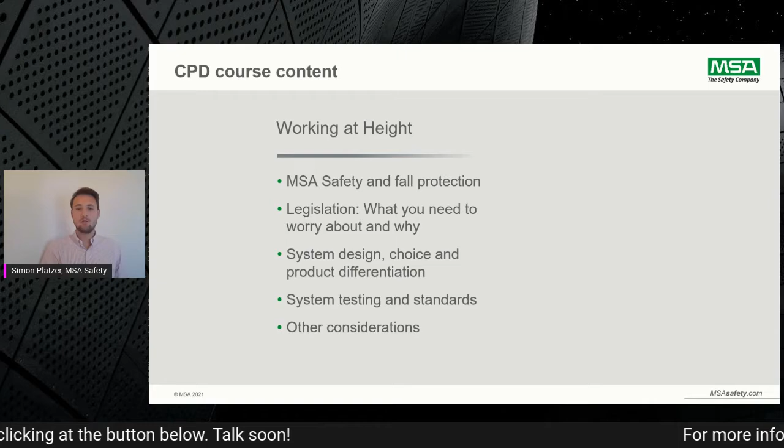The purpose of this section is to establish MSA's credentials in running the CPD and get the delegates familiar with both the MSA and Latchways brand offer so that they feel confident they are hearing the message from the right people.

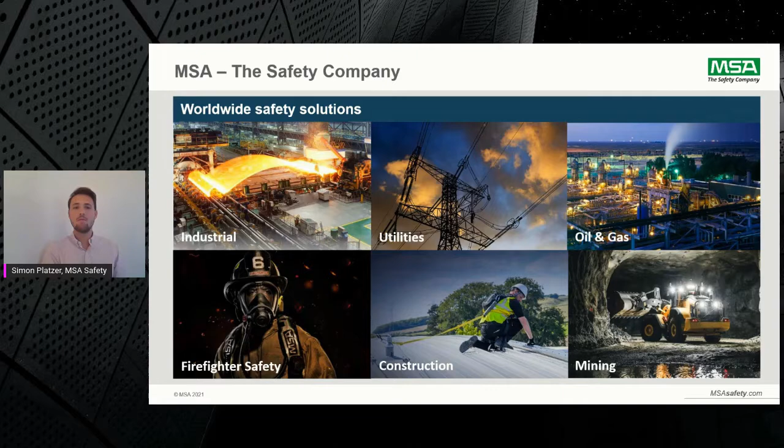With our global credentials, MSA is a global leader in the development, manufacture, and supply of safety products that protect people and facility infrastructures with over 100 years proven heritage. Our global headquarters is based in Cranberry Township, near Pittsburgh in the US, with annual sales of approximately $1.2 billion and manufacturing operations in the United States, Europe, Asia, and Latin America, backed by R&D facilities in 3 continents. Our comprehensive line of products is used by workers around the world in a broad range of industries, including fire service, oil and gas, petrochemical industry, construction, mining, and utilities.

We are specialists in fall protection. MSA acquired the Latchways brand in 2015 and established its Fall Protection Center of Excellence in the UK. The Latchways brand has always been a recognized leader in fall protection, and the origins of the product range go back to 1974, when the Latchways founder, Commander Tupper, developed the Transfastener, a product that allowed yacht crew to walk around the boat whilst permanently attached to a fixed cable. The system was quickly adopted for use in the industrial sector as a complete hands-free fall protection solution. It was designed to work on buildings, inclines, vertically, around bends and corners.

Nowadays, we still use the MSA Fall Protection Center of Excellence in the UK for our testing, for R&D actions, but also as a production plant. Last year, we made around 1,600 tests of our existing product range, but also of enhancements or new developments, to make sure that the products which are installed out in the field are perfectly tested and fit for purpose.

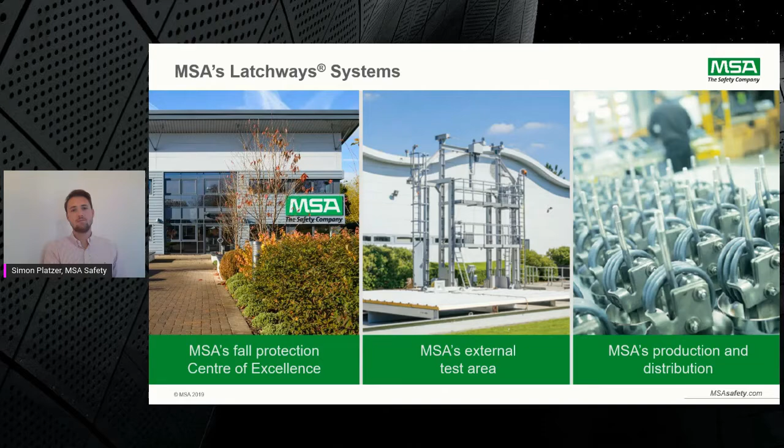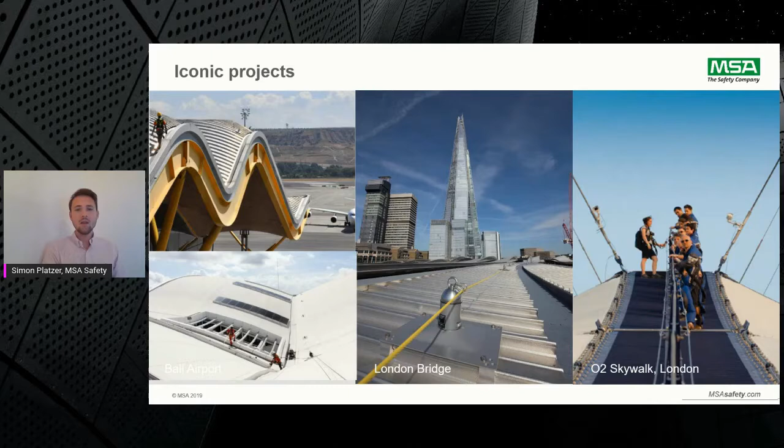In 2001, the Latchways Constant Force Post was launched, revolutionizing the installation of roof-mounted systems. The unique constant force technology was also incorporated into horizontal, vertical, inclined, and overhead cable lifelines. This is still virtually the only roof anchor system that supports the warranty across multiple leading roofing manufacturers. We'll see later why this is a very important fact.

Hence why we and Latchways Fall Protection Solutions are specified and installed all across the world. As you can see, with references going from Europe, from the O2 Skywalk or the London Bridge, which is well known, over to the Pentagon and NASA workshop in the US, but also on the Bali Airport, the new Doha International Airport, or Bangalore. There are references all around the globe where people trust the solutions of MSA Safety.

The purpose of this section is to explain legislative considerations for specifiers' responsibilities and what liabilities they may have if different products are used for a specification that haven't been tested to the same standard.

Legislation is there to save life. The importance of working at height legislation cannot be underestimated, with falls from height still being one of the largest causes of workplace deaths and life-limiting injuries. You are playing a vital role in helping eliminate that through better design safety measures and implementing to specification, both on new projects and retrofits.

As professionals, you must understand the workplace health and safety regulations as they relate to work at height. It is important that as designers, you ensure that you take up your responsibilities during the project design stage and facilitate continued safe access on buildings throughout their lifetimes. This also includes providing method statements detailing how the provision of safe access can be achieved.

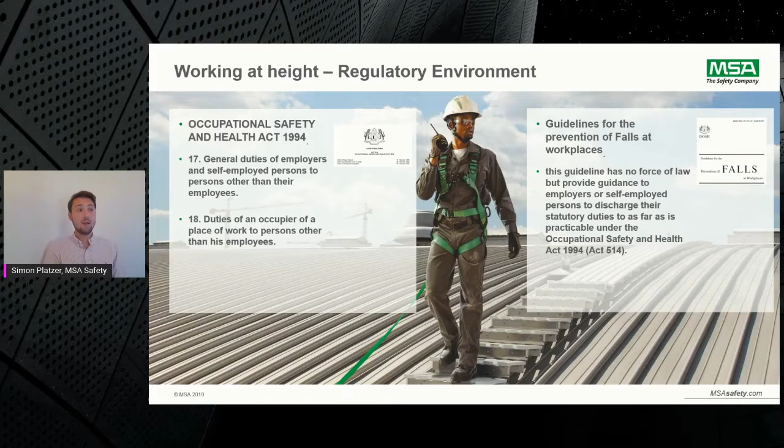On the screen, you can see the Occupational Safety and Health Act from 1994. We will now look into Task 17 and Task 18, which are general duties of employers and self-employed persons to protect persons other than their employees, and the duties of an occupier of a place of work to persons other than his employees.

Let's look into Part 4, General Duties of Employers and Self-Employed Persons, of the Occupational Safety and Health Act 1994.

Clause 17 clearly says it shall be the duty of every employer and every self-employed person to conduct his undertaking in such a manner as to ensure, so far as is practicable, that he and other persons not being employees who may be affected thereby are not exposed to risks to their safety or health.

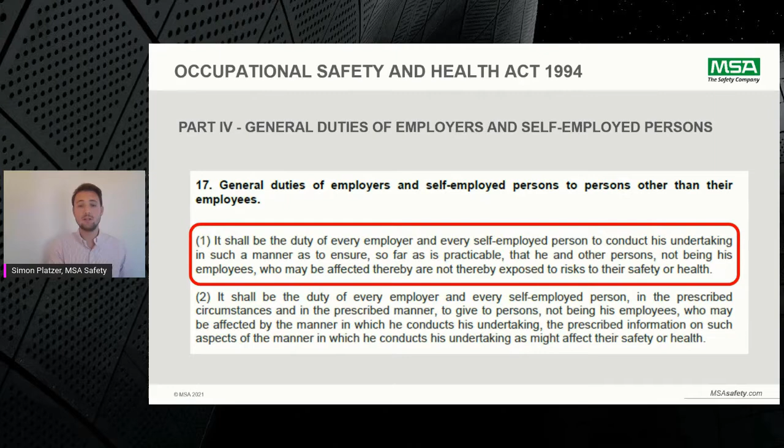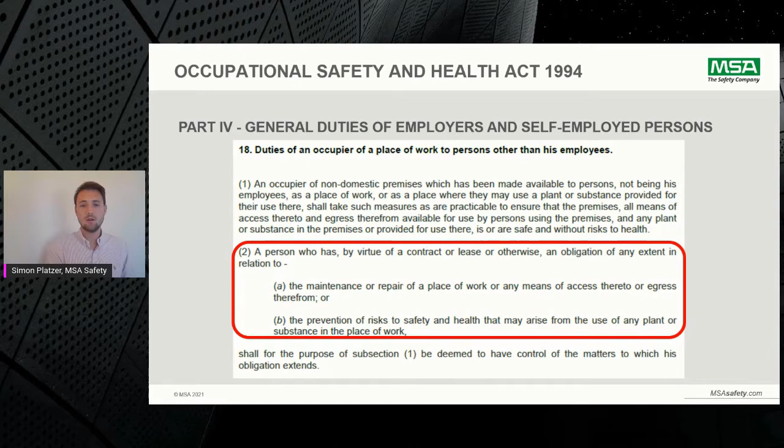Additionally, we'll look into Part 4, Clause 18, which says a person who has, by virtue of a contract or lease or otherwise, an obligation of any extent in relation to the maintenance or repair of a place of work or any means of access or egress, must address the prevention of risks to safety and health that may arise from the use of any plant or substance in the place of work.

So the key points for working at height are: you must document in the health and safety plan your fall protection strategy for managing all hazards and risks throughout the design phase through the occupation of the building, and then supporting any ongoing work such as building maintenance and cleaning.

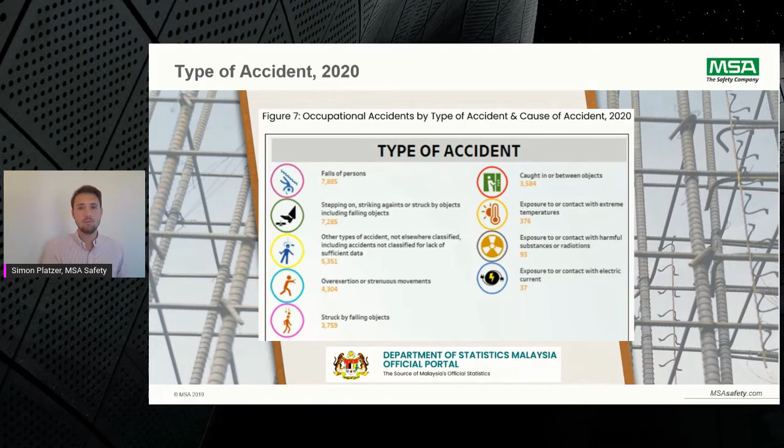Clarity on who is responsible for life is very important. The principal designer is responsible, and if there are multiple contractors, one principal designer and one principal contractor must be nominated.

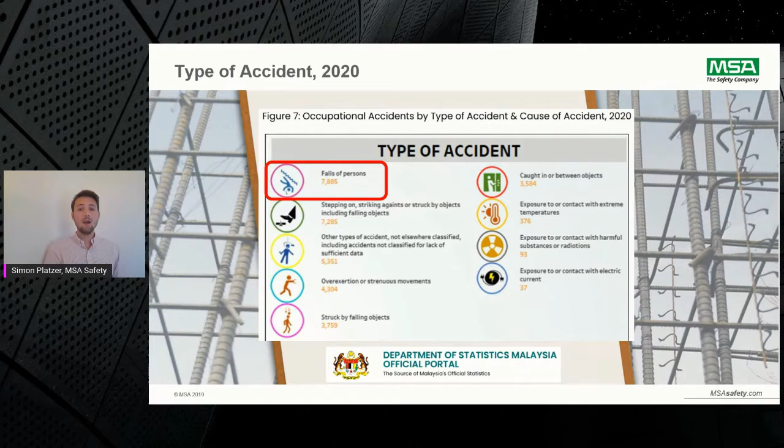Based on the Department of Statistics of Malaysia's official portal and reports of 2020, falls of persons are still the main cause of accidents, with 7,885 falls happening in 2020. So whilst we can see people wearing hard hats, safety boots, and many other PPE measures all over the place, falls of persons are still an underestimated risk, yet remain the largest cause of accidents in 2020.

So there are some CDM considerations for fall protection which principal designers must consider to be confident. Roof types affect the design and fixing method—take secret fix roofs, standing seam roofs, and warm flat roofs, for example. The anchor will perform differently on different materials when forces are exerted.

Check that the system you use has been tested in the way you need, meaning representative testing on the roof structure itself. Many contractors substitute like for like, but neglect the suitability for use on a specific roofing system. This is one of the main reasons it is important that a manufacturer tests on every roof type their system will be fitted to.

If the equipment you have specified is changed without your knowledge, you could be held legally liable in the unfortunate event of an accident. Energy absorption technology means that in the event of a fall, systems deploy in a controlled manner to absorb the force generated.

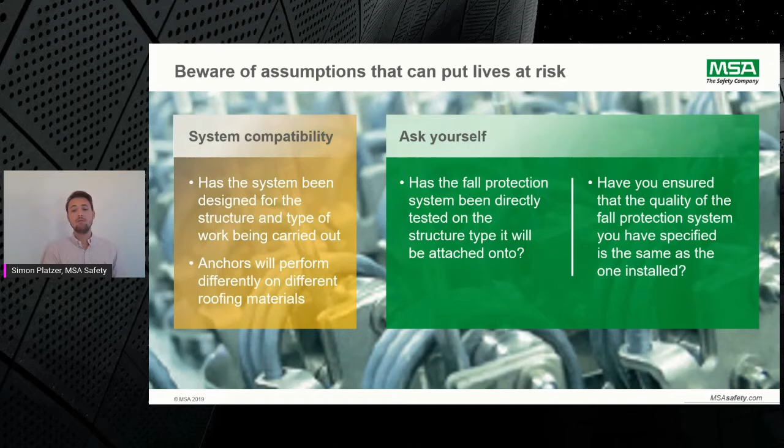In doing so, it ensures that the load exerted on the point of attachment will not exceed 10 kilonewtons, allowing the post to be fixed to a relatively delicate structure without the additional requirement to attach to structural steel or purlins. This ensures the roof or structure remains intact and workers are kept safe, even in the event of a fall.

Let's go to the next section of today's session. This purpose is to explain legislative considerations for specifiers and what liabilities you might have.

The hierarchy of fall protection helps structure your planning from the outset. So the hierarchy is: wherever possible, firstly eliminate the risk; next, where you cannot eliminate, guard the hazard; and finally, protect the worker.

The fall protection solution specified should be based upon the area requiring access, the frequency of access required, the number of people needing access to the area, and the level of training these people have gone through or will undertake. For instance, we can choose both collective and personal fall measures to prevent a fall, and similarly implement personal safety measures that can reduce the consequence of a fall.

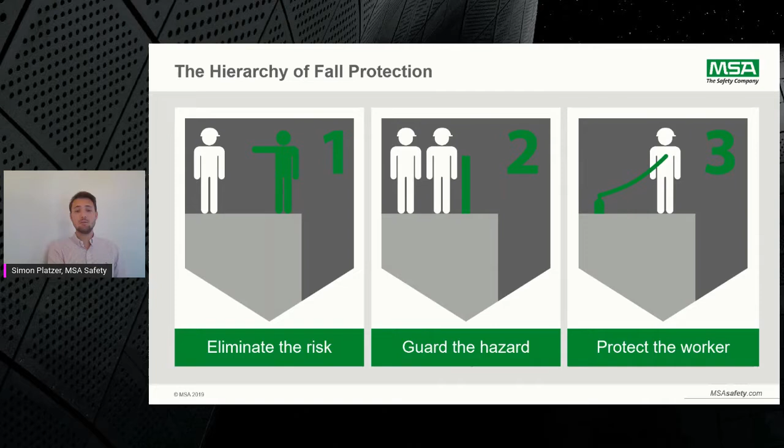Again, we are looking into the hierarchy of falls or risks. First of all, we want to eliminate or substitute the risk as much as we can. If we can work from ground level or substitute the maintenance process completely, then we should be doing so.

If that's not possible, we should be looking into passive fall protection, so we want to guard the hazard by isolating or separating the hazard from the workspace.

If that's also not an option on your project, then let's go into the personal fall protection hierarchy, which means first of all we should always try to make sure a fall restraint system is applicable on site. That secures the workers using a short lanyard, short enough to protect the worker from falling off the edge.

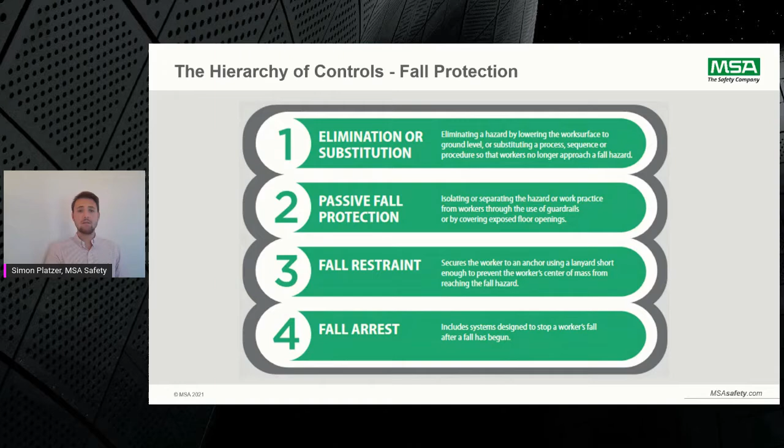Due to certain challenges on projects, we might have to go to the last phase, which is a fall arrest system. In that case, we will have to make sure we have a suitable system and a suitable product selected, but also incorporate the right rescue procedures.

Let's look at system choices.

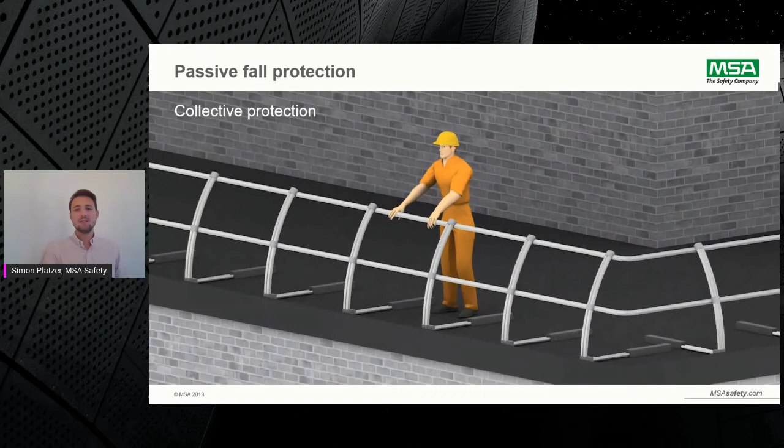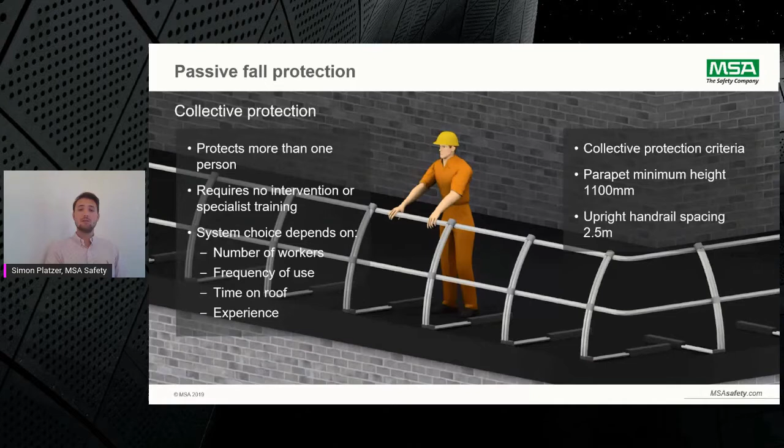Collective protection is any system that allows numerous untrained users to access an area whilst being protected from fall hazards, without the need for personal protective equipment such as harnesses, retractables, or lanyards. Once properly installed or erected, collective protection does not require any action by workers or specialist training to keep them safe. There are detailed criteria to consider, such as the parapet minimum height, the upright handrail spacing, the roof area where it's installed, and the standards it has to comply to.

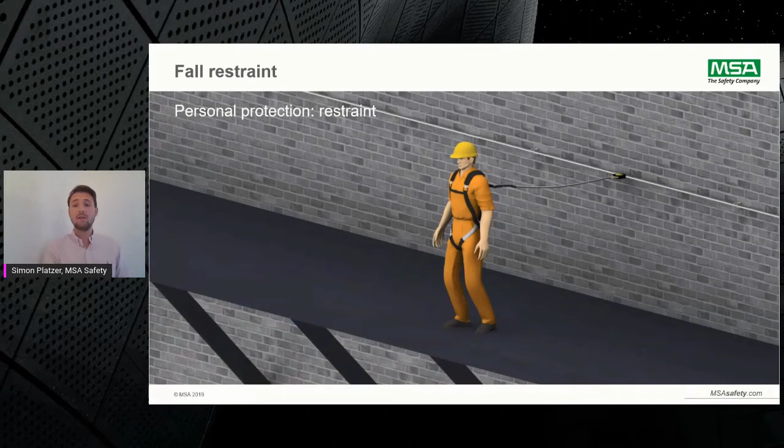Personal protection systems safeguard individual users from risks associated with working at height and are often specified when a collective system is not necessary or possible. There are two categories of personal fall protection systems, as we've seen before: fall restraint and fall arrest. Often the generic term fall arrest system is used for both types, but there are critical differences to understand between them.

The safest version of a personal protection system is a fall restraint system, where each worker wears a full body harness and a lanyard connecting them to a horizontal lifeline system or an anchor point, which are anchored to the building or structure. The lanyard length is fixed, so the worker cannot reach any fall hazard. With no need for lanyard adjustment, only basic training is required. A fall restraint system should always be designed to use a fixed 1.8 meter long lanyard, keeping users from accessing any fall hazards, and should always accommodate 2 people as a minimum to ensure safe working practices are adhered to.

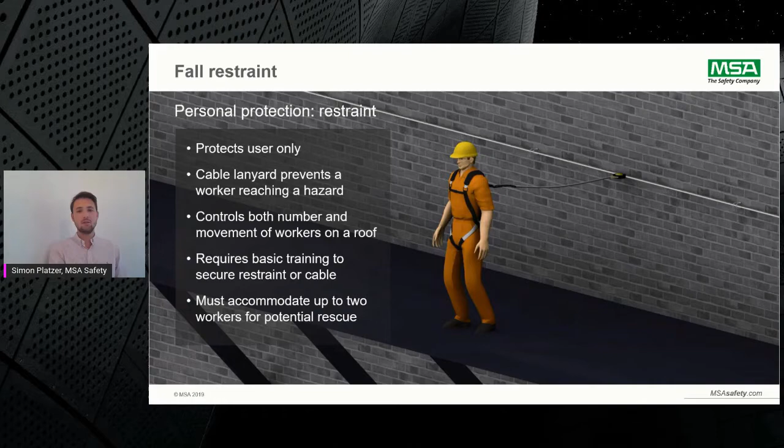In some instances, it's impractical or impossible to design a fall restraint system, and there are fall hazards which cannot be eliminated or avoided, such as roof lights. These cannot always be guaranteed to be safe to walk on. In situations like this, a fall arrest system is required.

This means that fall hazards can be reached by a worker on a fixed or variable length lanyard when they are secured in a lifeline system. A fall arrest system must have restricted access, and personnel using this system must have undergone specialist training to safely secure and adjust their personal protective equipment. For example, some routes may require the use of two lanyards to safely navigate into areas requiring access. Like the fall restraint system, a fall arrest system must be designed to accommodate a minimum of two workers, as there is an additional requirement for a rescue plan to be in place should a fall occur and the user be suspended in their harness.

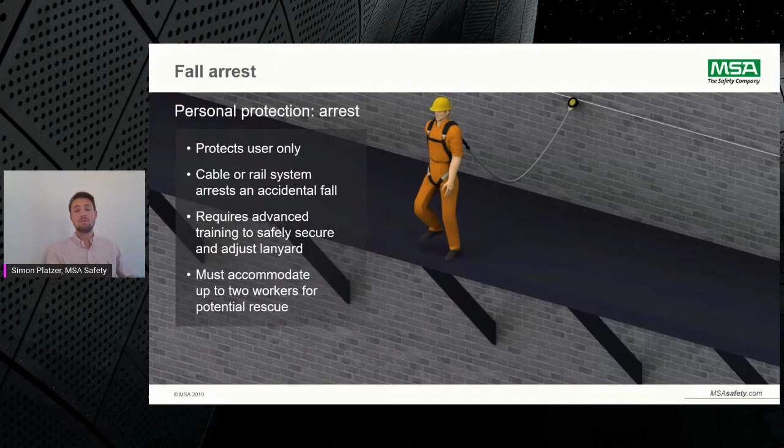Let's look at the differences in system designs. In rooftop applications, generally a designer must select a perimeter or a ridge system. The first system shown here is a perimeter system, with which the user connects immediately to the roof access location and has full movement around the roof perimeter or edging, whilst remaining in fall restraint at all times.

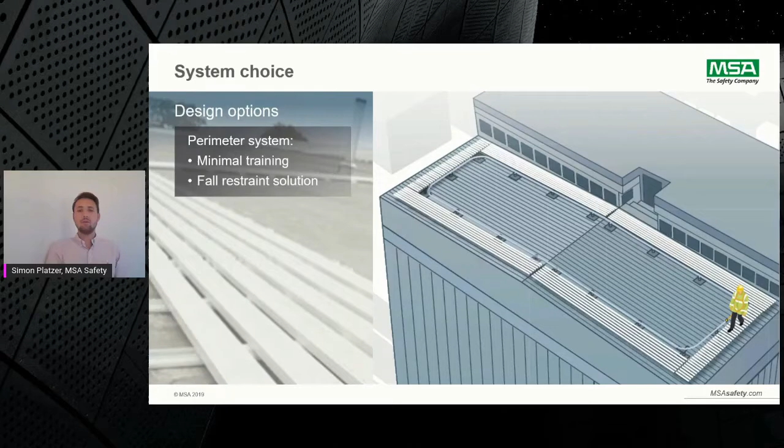The second option shown is a ridge system, which also uses additional single-point anchor posts to allow users to access the roof corners. This type of system requires a comprehensive level of user training to ensure that adjustable personal protective equipment is used the correct way. In both instances, but particularly with the ridge system, the designer must check that the system specified has been tested and approved to be a fall arrest system.

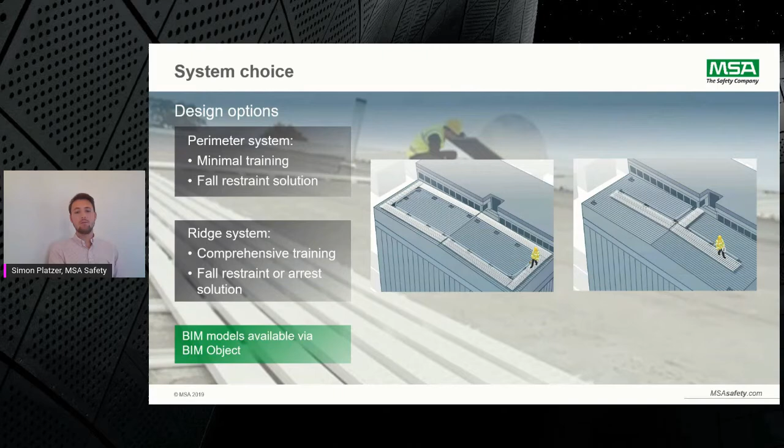So let's go on to understand more about the test standards for fall protection systems. The purpose of this section is to highlight the key standards which need to be adhered to and explain what testing is covered and where specifiers need to be cautious in terms of the testing, so that they can make the right system or product choice.

First of all, we'll be looking into the guidelines for anchors. According to guideline, how many kilonewtons of force must a single person fall arrest anchor be able to withstand? You can guess now, and I will tell you: it's 15 kilonewtons. Let's go to the next one. According to guideline, how many kilonewtons of force must a two-person fall arrest anchor be able to withstand? Guess again. It's 21 kilonewtons, so we're talking about 2,100 kilograms.

And last but not least, according to the guideline, what is the minimum ultimate strength for rope used in industrial rope access? It's 25 kilonewtons, so we're talking about 2,500 kilograms, which needs to be the ultimate strength for rope use in industrial rope access. These examples show that the loading per person, even if we are only considering the PPE applicable to 100 kilograms or possibly 120, 140, the anchor itself must withstand a lot more to really protect the worker in the event of a fall.

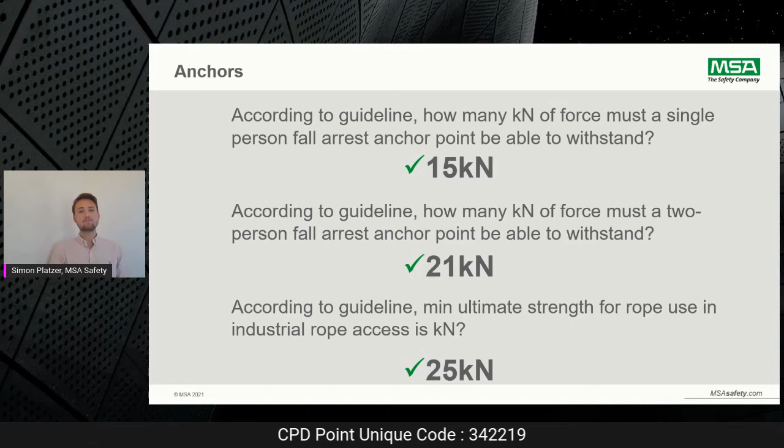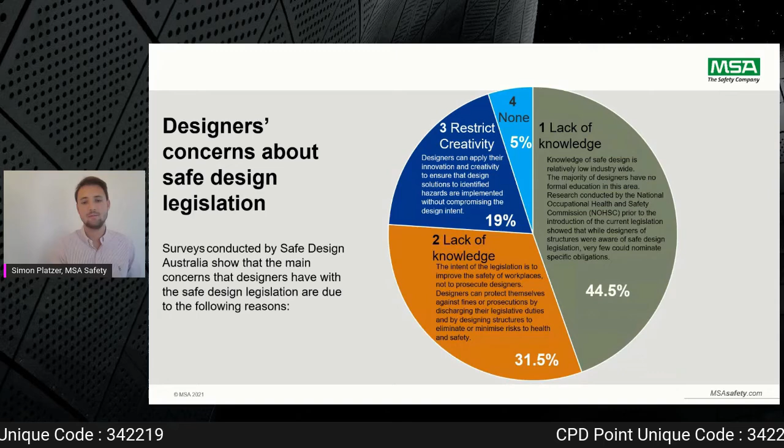So the designer must ensure, so far as is reasonably practicable, that the structure is designed to be without risk to the health and safety of persons who manufacture or construct any component of the structure, who use the structure for the purpose for which it's designed, or are involved in the maintenance or disposal of that structure.

The term 'reasonably practicable' is also used in relation to consultation with other duty holders and between designers and clients on how risks to health and safety during construction can be eliminated or minimized.

Reasonably practicable means that which is, or what is at a particular time, reasonably able to be done to ensure health and safety, taking into account and weighing up relevant matters including the likelihood of the hazard or risk concerned occurring, the degree of harm that might result from the hazard or risk, and what the person concerned knows or ought reasonably to know about the hazard or risk and ways of eliminating or minimizing it.

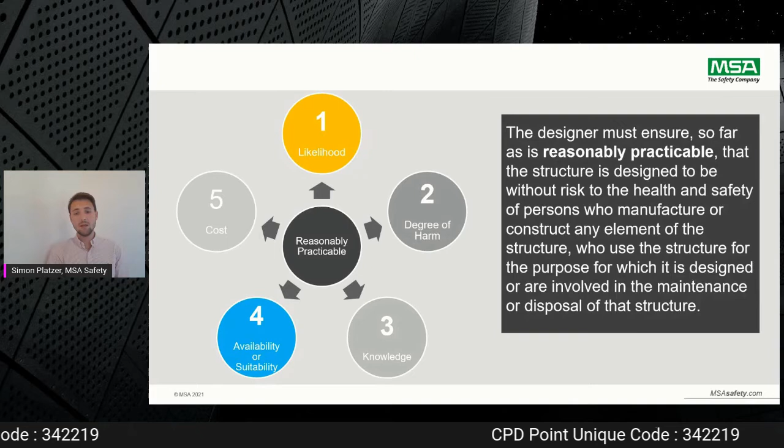Also, the availability and suitability of ways to eliminate or minimize the risk, and after assessing the extent of the risk and the availability of ways of eliminating or minimizing it, the cost associated, including whether the cost is grossly disproportionate to the risk.

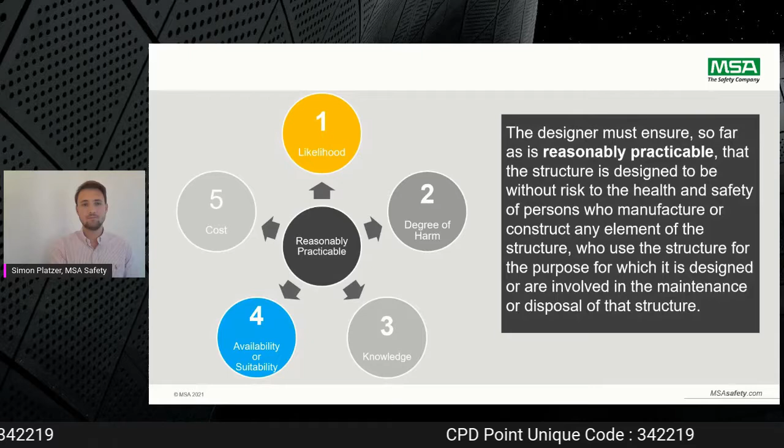So let's look into the safe design of structures. First of all, we start with prevention: make decisions at the concept design stage to eliminate or minimize hazards at the source.

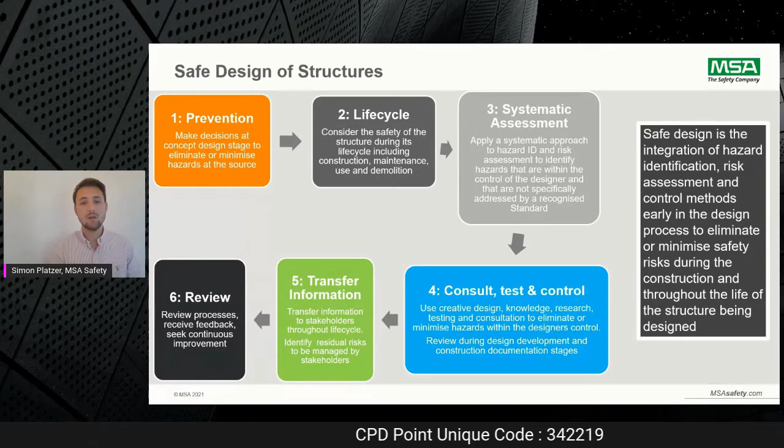Then we'll be thinking of the life cycle. Consider the safety of the structure during its life cycle, including construction, maintenance, use, and demolition.

Then we'll go through a systematic assessment: apply a systematic approach to hazard identification and risk assessment to identify hazards that are within the control of the designer and that are not specifically addressed by a recognized standard.

Consult, test, and control: use creative design, knowledge, research, testing, and consultation to eliminate or minimize hazards within the designer's control. Review during design development and construction documentation stages.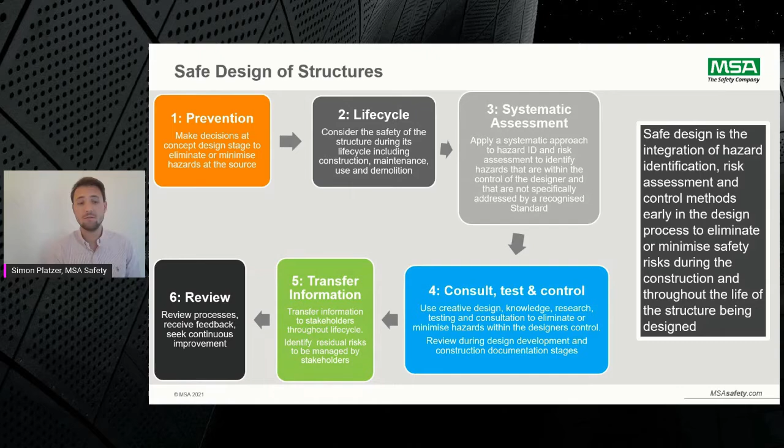Then we'll transfer the information to all stakeholders throughout the life cycle, identify residual risk to be managed by other stakeholders, and review the process, receiving feedback and seeking continuous improvement.

For designers, safety in design provides a system to formally document a process demonstrating systematic risk management. For clients, cost savings may be found in preventing future retrofitting and downtime. Insurance premiums may be reduced as well as the risk of litigation.

Occupants may see benefits in reduced injury management interventions, increased usability, reduced maintenance costs, and improved productivity. So again, these are all the benefits of safe design.

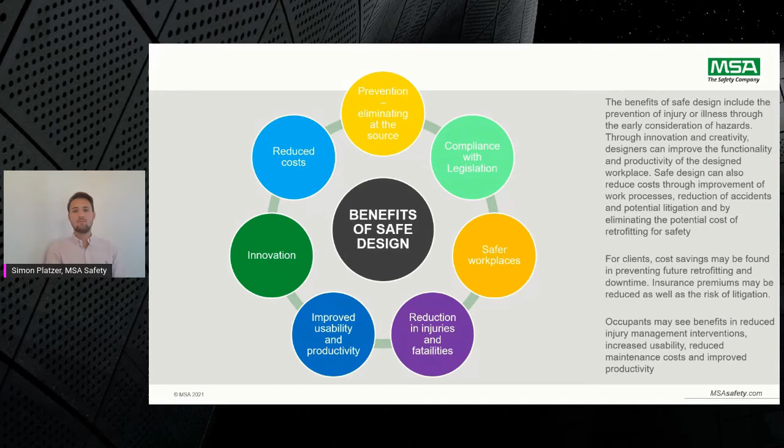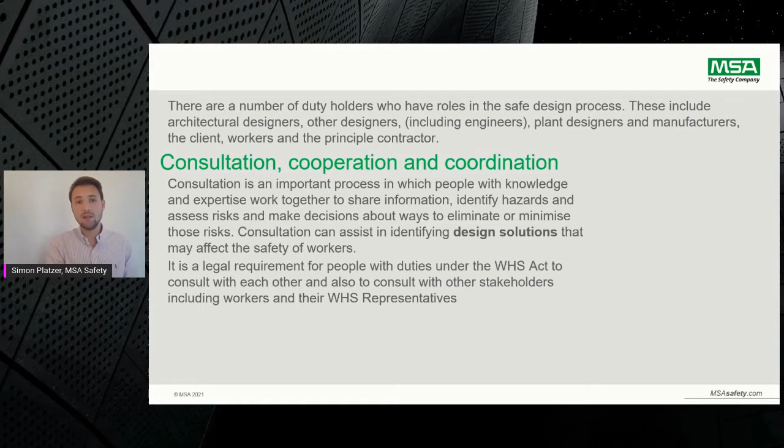There are a number of duty holders who have roles in the safe design process. These include architectural designers, other designers including engineers, plant designers and manufacturers, the client, the workers, the users themselves, and the principal contractor.

So it's all about consultation, cooperation, and coordination of the design process to minimize hazards, but also throughout the complete installation and the life cycle of the products.

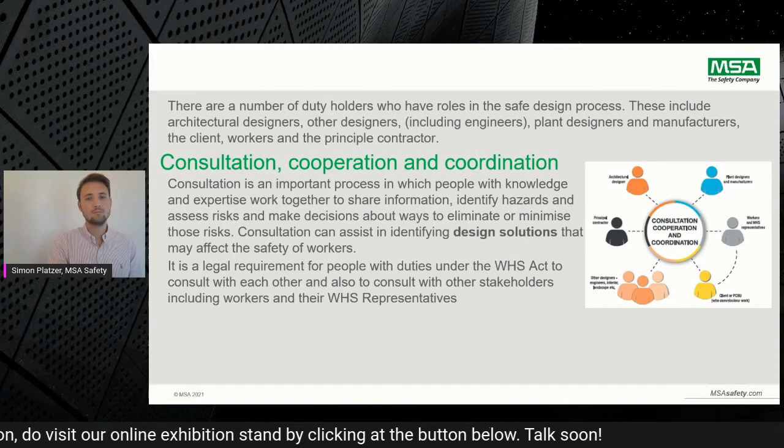As a specifier, you cannot assume that a 1997 tested system will be capable of withstanding two people falling on it. If it isn't, it will fall short of today's standards. The 1997 standard didn't adequately cover restraint systems.

The 2012 standard specifically covers restraint systems and possible misuse—for example, if the incorrect lanyard length is used, a fall hazard then becomes accessible. That's how we would see it in Europe.

And if we look into the Occupational Safety and Health Act of 1994, systems must meet the requirements under Australian New Zealand Standard 1891.4 from 2009. This covers both fall arrest and fall restraint as a work position. The tests include fixings and base materials, and multi-user devices must support at least two users falling simultaneously.

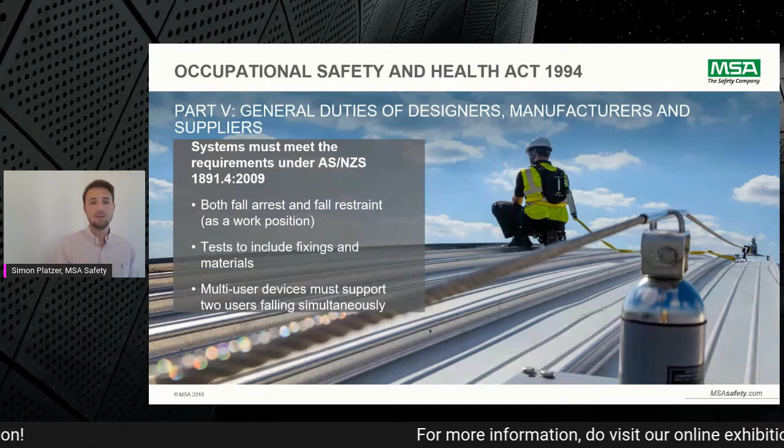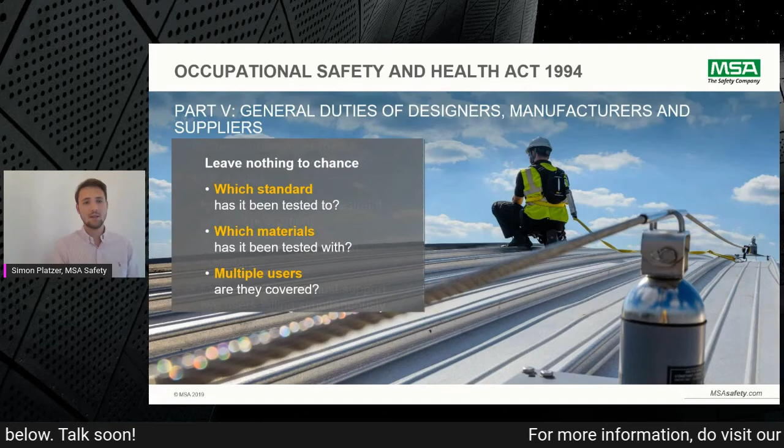So it's really leave nothing to chance. Which standard has the products you're specifying or want to use been tested to? Which materials has it been tested with? And are multiple users covered?

We have to make sure that the duty holder is aware that all the PPE choices satisfy the new test requirements. So we are not only talking about the installed products you would specify, it's also the PPE connected to the systems themselves.

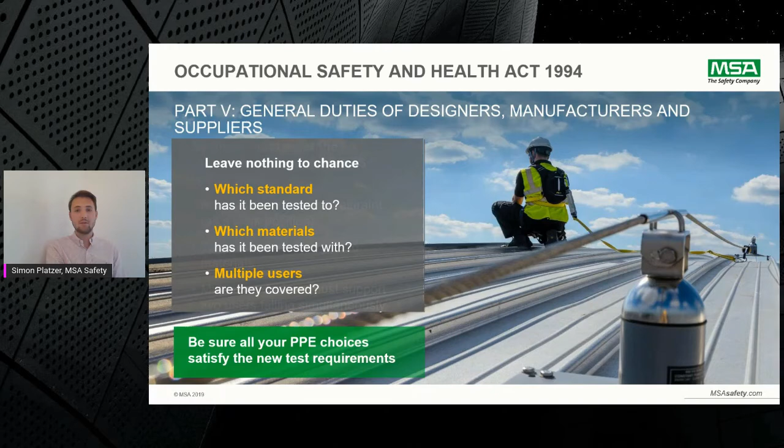So how can you be sure the fall protection system is guaranteed for the application and the structure? When it comes to particular manufacturers' roof systems, a non-approved fall protection solution installed on a roof could invalidate the roof warranty. Ensure that when a certain roof system is specified, check with that roof manufacturer if there is a particular fall protection system forming part of the guarantee.

It's worth remembering this when considering any future roof issues, that if a non-approved fall protection system had been installed, it may well invalidate the roof warranty or guarantee.

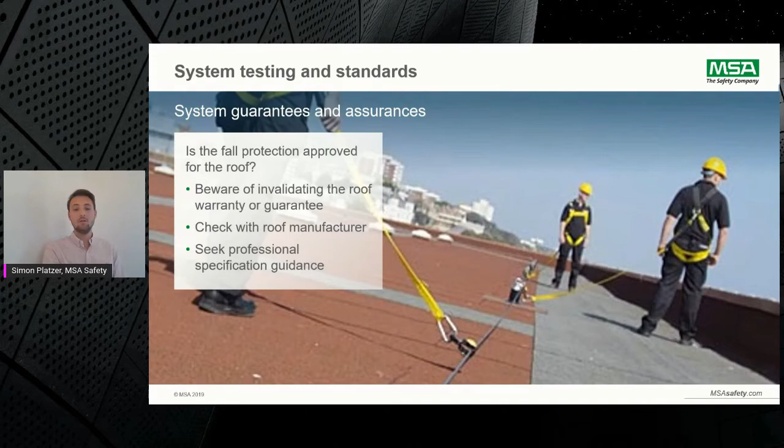Again, you need to go through the same due diligence process when looking at temporary edge protection for construction as you would for permanent protection for ongoing building access.

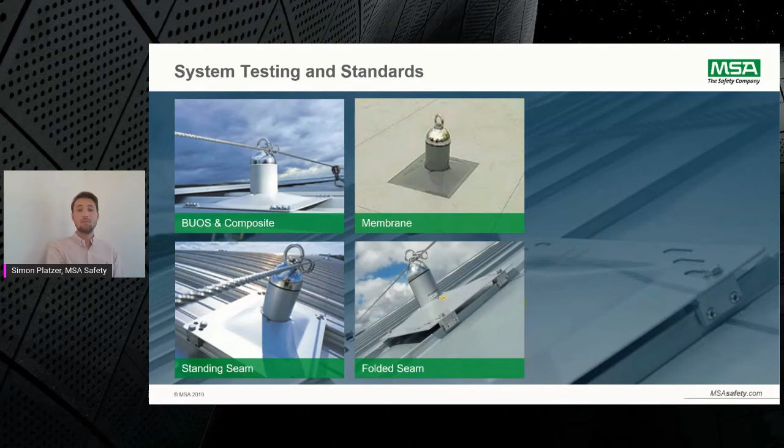So, thinking back to system testings and standards, we are mainly considering four roof types: trapezoidal buildup on site, composite panels or sandwich panel roofs; membrane, which is most of the time a flat roof, could be a reinforced concrete structure with insulation and waterproofing, or a trapezoidal deck or timber deck; and standing seam, including secret fix and folded seam. These are the main roof types we would be seeing in all global markets.

So if we look into how testings can be performed, we were also thinking of the Australian New Zealand standard 1891-2 2001, and Australian standard 1891.4 2009, which covers industrial fall arrest systems and devices, part 4.

You have to be aware of the huge amount of energy that is created when a fall is halted or arrested by a fall protection system.

Generally, a new roof construction may only be capable of withstanding somewhere around 25 kilonewtons, or approximately 2.5 tons of force, so a fall protection manufacturer must look to reduce the loads going back to the roof structure to well below these figures. Energy absorption technology within a fall protection roofing anchor reduces the load back to the roof to 10 kilonewton.

And even with a factor of safety of 2, resulting in 20 kilonewton, this is still easily below the failure point of a new roof construction.

If a fall protection product is not tested for its load absorption capacity, huge forces can be applied to the roof construction in the event of a fall. This may result in the roof failing or coming apart in some way.

We've already gone through representative roof testing and also the importance of checking for roof manufacturer approval. Also ensure that the product you're specifying works in any direction, as realistically there is no way of foreseeing which way a fall might occur on a system.

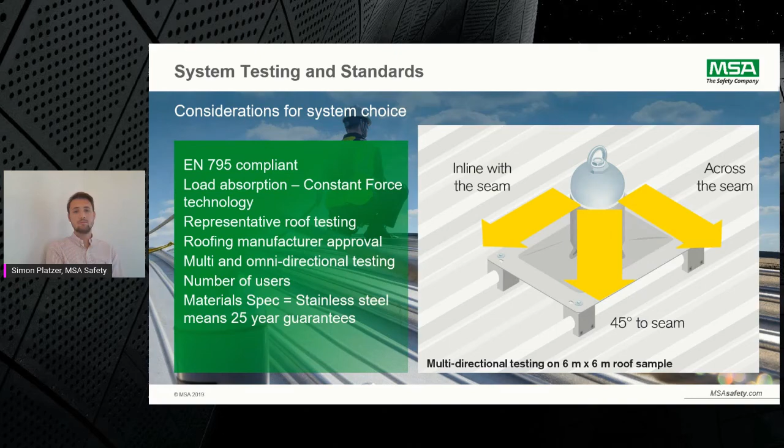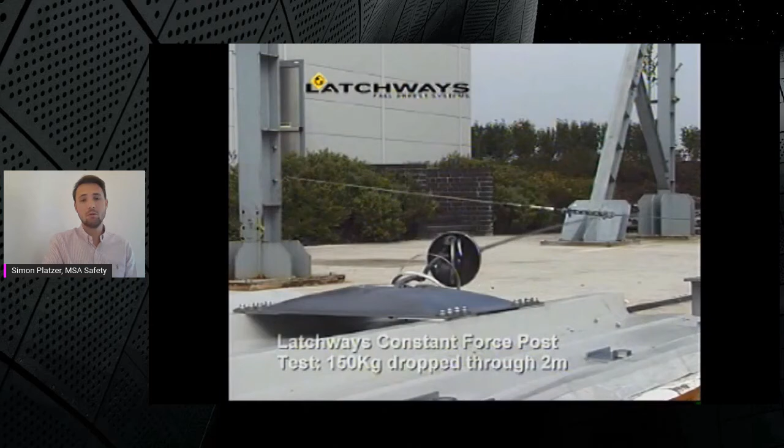And as you've heard a couple of times through my presentation, energy absorption is something very, very important. What you could see here is a test of a 150 kilogram person or weight falling into an anchor.

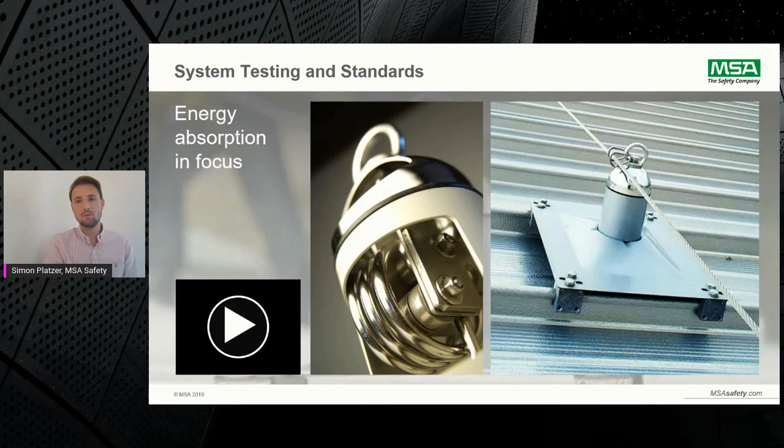Without the energy absorption, we could not make sure that the roof structure itself would withstand the loading and could potentially fail. Therefore, please make sure that all the products you specify and use do have appropriate load absorption integrated.

So this section runs over a series of other working at height considerations, from material considerations, walkways, ladders, window maintenance, etc.

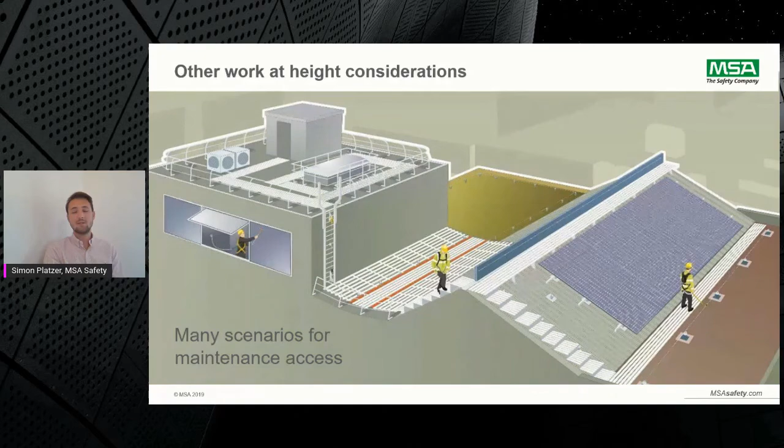But not every project considers the 4 main roof types we've been discussing before. It's also bespoke systems. Bespoke engineered systems are a very important and crucial point for every fall protection manufacturer, but also for yourselves as a specifier and designer. Please make sure that if no standard product can be used, you consult manufacturers directly to make sure the new or bespoke product covers the variety of standards, but also is safe to use in the event of a fall.

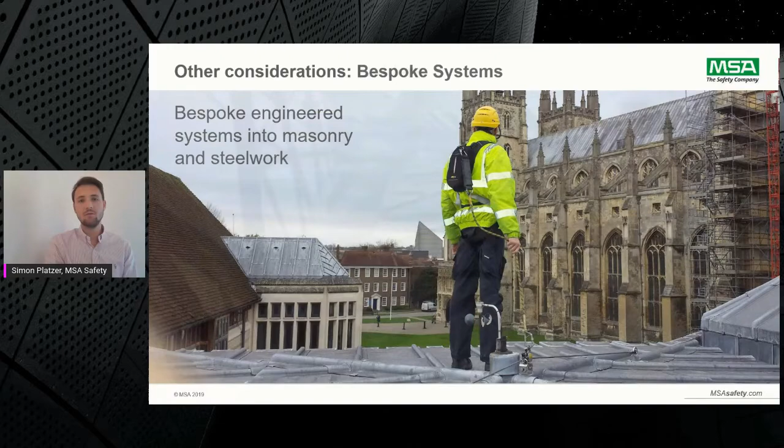Many rooftops are accessed using a fixed ladder. This can create further fall risks. So it's not only the rooftop itself and the edges or roof lights, it's also the ladder to get up to the roof. The Health and Safety Executive confirms that ladder hoops offer no positive means of fall protection. In fact, they can be harmful should someone fall and strike the hoops.

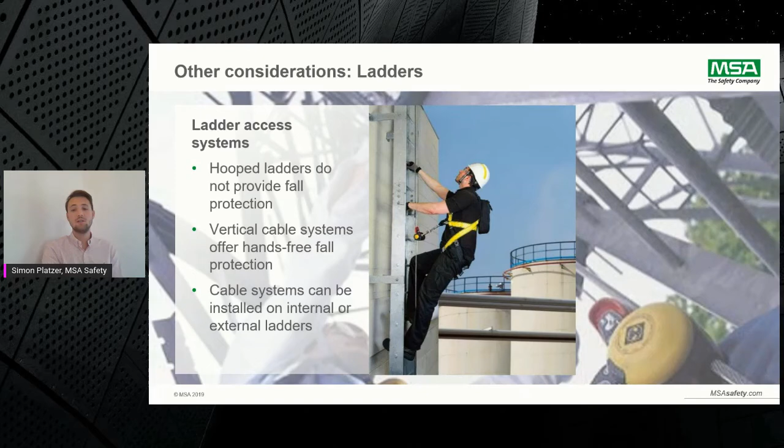The preferred industry option is a central rung-mounted cable lifeline system. Whether installed onto an internal or external ladder, workers have the flexibility to use both hands to climb while remaining safely attached. Unlike hoop systems, cable lifeline systems present no obstructions that could cause serious injuries while arresting a fall.

For fall protection in larger spaces, such as factories and rail car loading bays, self-retracting lanyards can connect to an overhead lifeline cable. Automatically extending and retracting, they offer non-intrusive protection. SRLs remain taut, don't impede movement, and keep hands free to work.

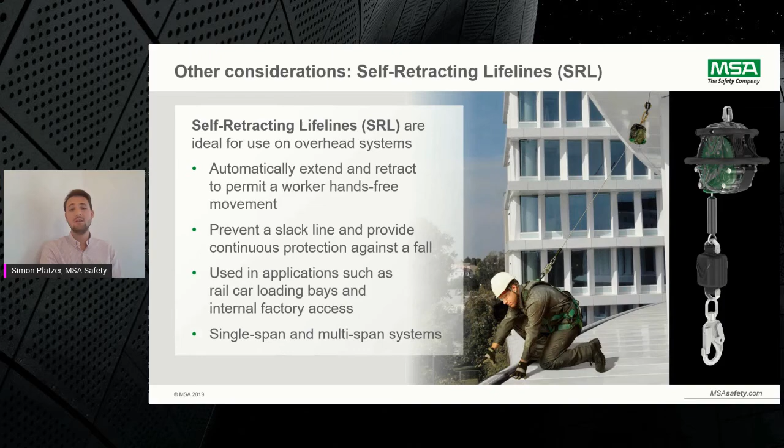In certain building designs, access from inside is needed to carry out external work, for instance external window cleaning and maintenance. Legislation for this sits within the CDM regulations of 2015 from the UK. Eye-bolts are commonly used, but both bolts and fixings need to be able to withstand the loads generated when a fall is arrested. For correct performance, installation must comply with EN 795, but also with British Standard 7883.

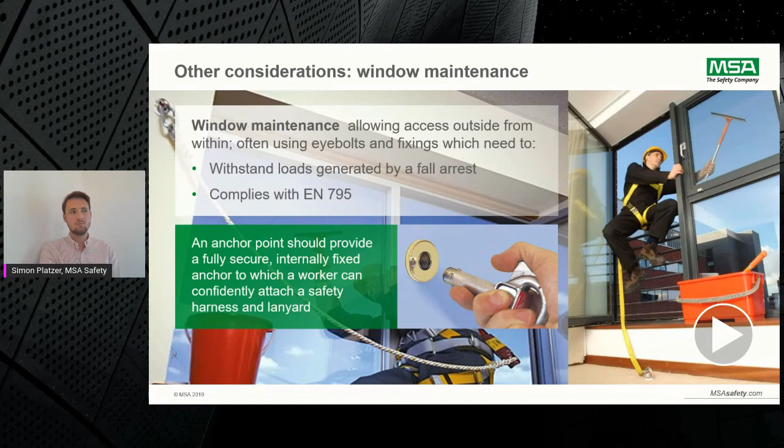Regulation 4 of the Work at Height regulations states that every employer must ensure that work at height is properly planned, and that planning includes planning for emergencies and rescue. Employers must have a specific and planned rescue method. The use of emergency services is not an option. There is a legal obligation to ensure any casualty is attended and recovered quickly.

Products are available which incorporate a personal descent device. In the event of a fall, the harness will not only arrest the fall but also allows the worker to initiate their own rescue. Pulling a parachute-style release cord lowers them up to 20 meters to ground clearance in gently less than 30 seconds.

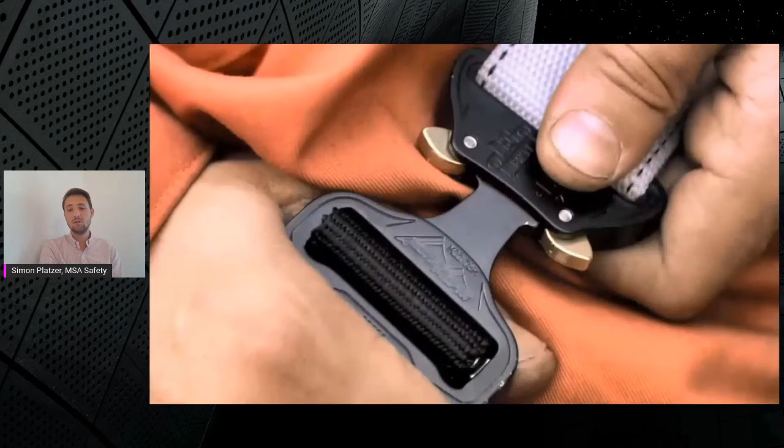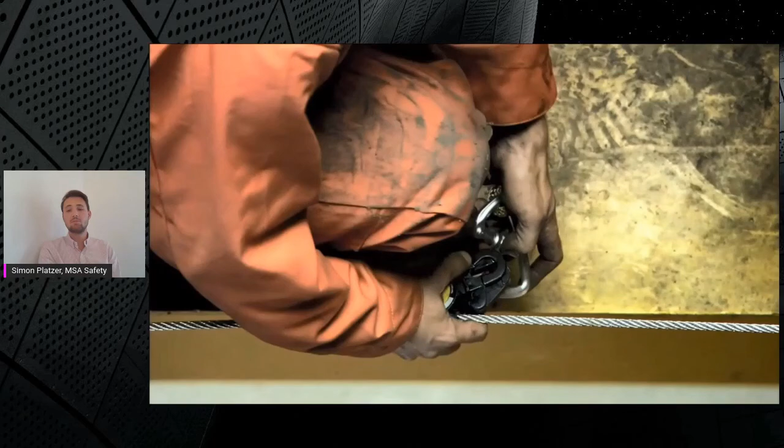Even if suspended and unconscious, a colleague can safely activate the release with a specially designed pole using the secondary descent mechanism. The benefit of such products is that they are simple, and there is no complex, costly training course needed.

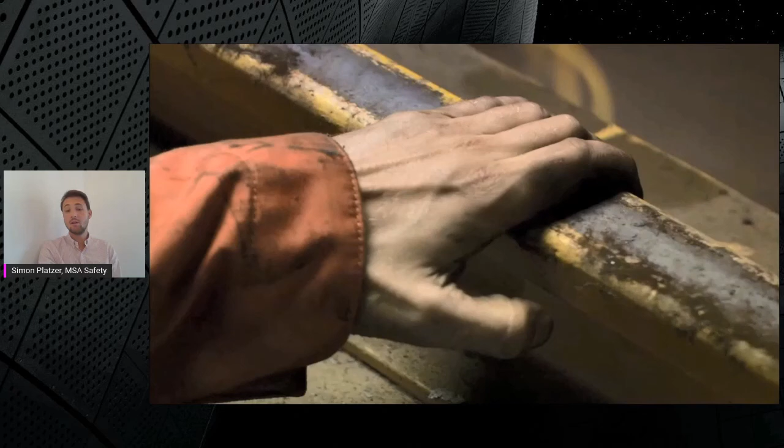Efficient - no supervision or rescue team needs to be on standby. It's productive - instant self-rescue minimizes disruption and downtime. And it's safer, as no rescue is needed, meaning there is no risk to anyone else.

What you can see now is the person, after his or her fall, will activate the rescue mechanism and will therefore descend safely to the next structure down below.

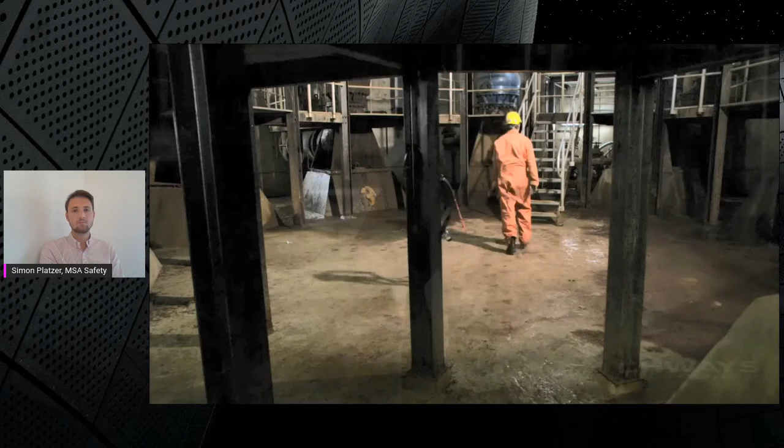So let's wrap up today's course and go for a quick summary.

Having gone through this seminar, you should now be able to appreciate how legislation attributes responsibilities for the provision of safe access. You should be aware of elements to consider when choosing and specifying a fall protection system, and the ways it can be integrated within the building design to be compliant. You will be able to differentiate between collective and individual protection, between fall arrest and fall restraint. You will be able to specify the correct system based on the varying competence levels of individuals using the different systems, and be able to demonstrate that the system is fit for purpose.

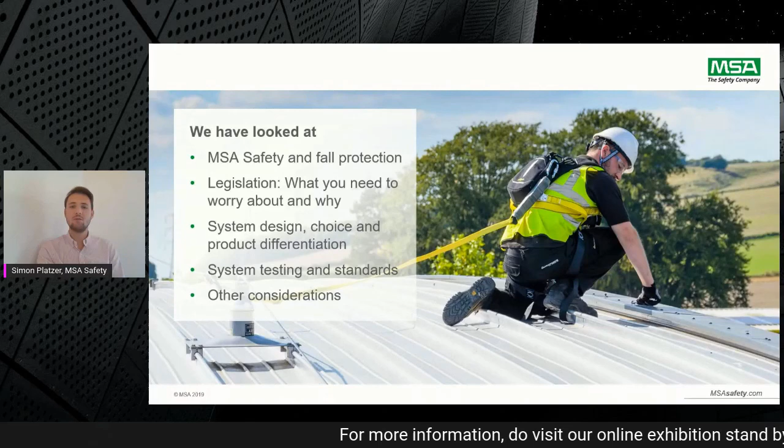You're now aware of the major changes to testing standards for fall protection equipment and their impact on choosing products. And you've seen how solutions can help with challenges like maintenance and rescue. If you have any queries, leading fall protection manufacturers can help you with the design of your fall protection systems.